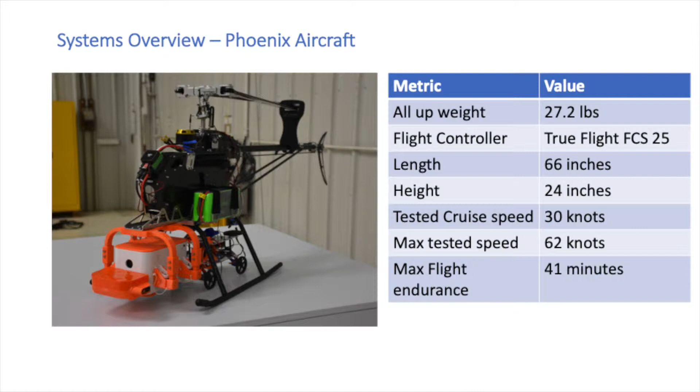Penn State's 2019 aircraft, the Phoenix, was built from a Mikado Logo 800. Modifications to the Mikado Logo 800 include enlarged landing gear, mounting plates for our avionics enclosure pod, and mounting points for our rover. The battery mounts were also changed in order to allow larger capacity batteries. In flight tests, we were able to reliably navigate at 30 knots, and our max speed tested was 62 knots. During a mixed flight of hover and cruise speed, we were able to achieve a flight time of 41 minutes.

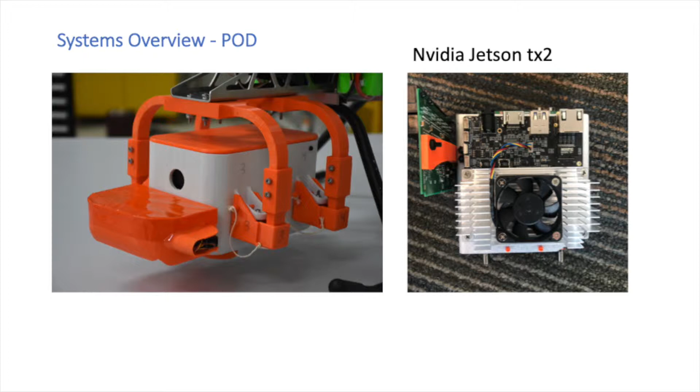Sensors related to the imaging pipeline are placed inside the passive oscillation dampening system, which is separated mechanically from the rest of the aircraft. The pod weighs 890 grams full of sensors and has a resonant frequency of 13.2 Hz, well below the 28 Hz of the main rotor. Inside the pod are the dual camera system, the Wi-Fi data link, the Jetson TX2, and the Ethernet switch.

Penn State UAS will attempt all tasks in the mission demonstration. We have a high degree of confidence in our autonomous flight, waypoint accuracy, and obstacle avoidance. For ODLC, we have medium confidence that our autonomous images will be classified correctly, while we have a high degree of confidence for actionable intelligence, geolocation, and characteristics. For airdrop, we have a high degree of confidence for accuracy and a medium degree of confidence for driving to location.

Penn State UAS has relied heavily on simulations to develop our system. Simulation data is then verified with unit tests and further verified with integration tests. During our flight tests, we have transitioned from manual to autonomous flight 13 times. To ensure ground resonance isn't added into our design, every time a mechanical change that may affect harmonics is added, a spin-up test is required.

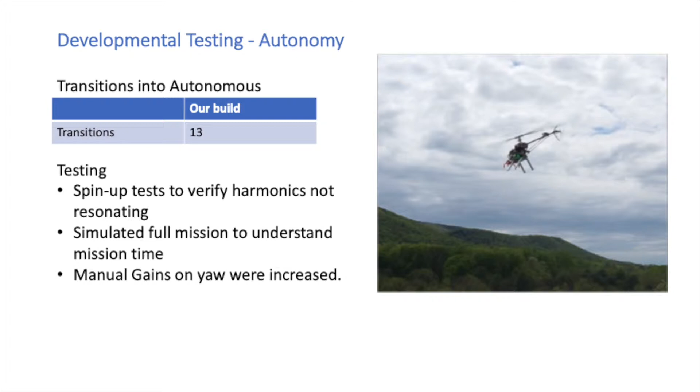To determine waypoint accuracy, our mission telemetry logs are compared against the mission plan. Due to the battery failure and subsequent crash, we were not able to gather waypoint accuracy data in the field. We anticipate highly accurate waypoint accuracy because of our in-simulation tests and our sensor validation on the GPS.

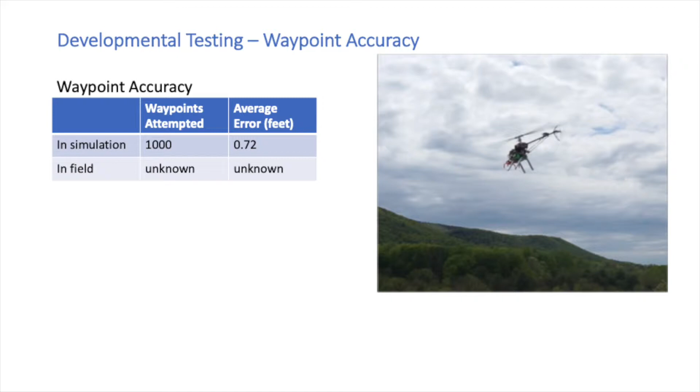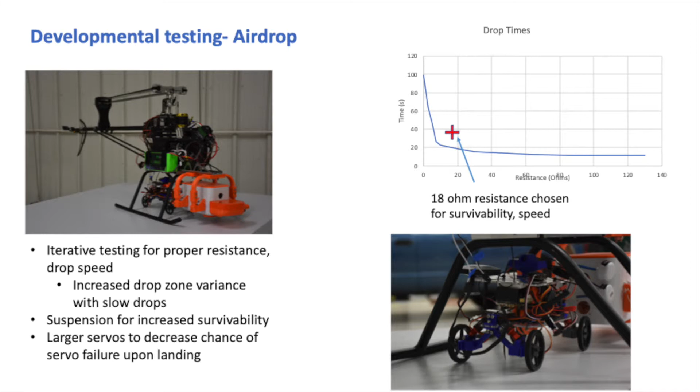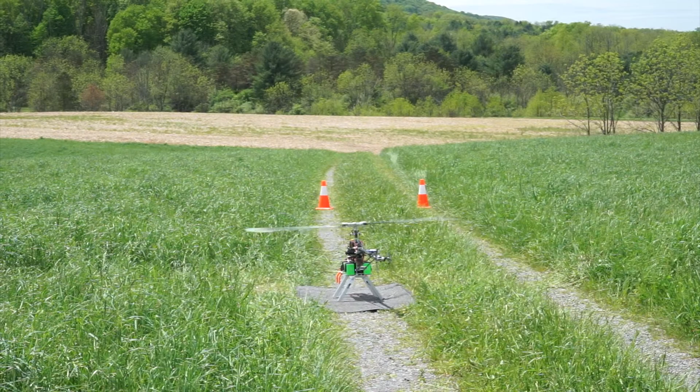Our battery failure and subsequent crash occurred during developmental testing, and no full mission tests were ever conducted. We would score ourselves a 0 because they were not conducted. Though if the mission tests were conducted, we have high confidence that we would score well, close to 90%. The rest of this video will be a beautiful flight of our helicopter.